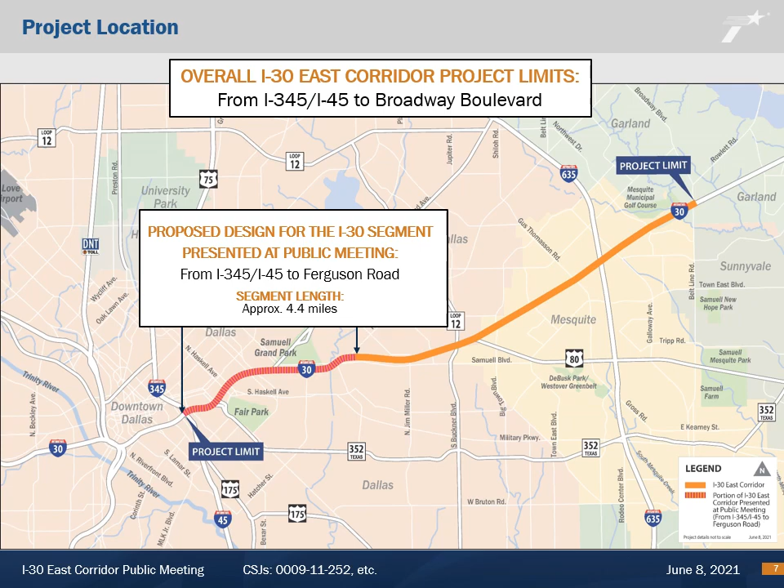This slide provides a brief overview of the project's history and the interagency coordination that have occurred as the project has advanced in its development. Our current work builds off these 3 major studies, along with other studies within the corridor.

First, the 2003 East Corridor Major Investment Study, or MIS, studied I-30 from west of I-45 to Dalrock Road and included multimodal recommendations such as bicycle and pedestrian facilities like the Santa Fe Trail, transit improvements such as the DART Green Line, and I-30 capacity improvements with reversible managed lanes.

An MIS was a precursor to what we now call a feasibility study. Second, the 2005 Project Pegasus included I-30 from Beckley Avenue to east of I-45 and I-35 east from Colorado Boulevard to State Highway 183 and culminated in approved schematic and environmental assessment. This study led to the construction of the

I-30/I-35 East Horseshoe Project. Finally, the 2016 CityMAP considered scenarios for freeways around downtown Dallas, including I-30, I-35 East, and I-345/I-45. CityMAP had 2 I-30 East Corridor scenarios. The first was to construct I-30 East Dallas below grade, and the second proposed relocating I-30 to the south.

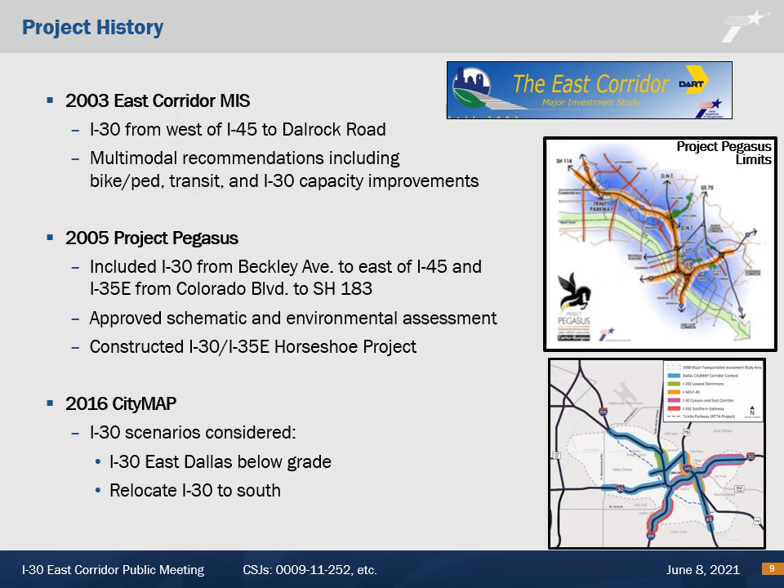In developing the various planning scenarios presented in the TxDOT CityMAP Study, TxDOT applied a variety of guiding principles as it sought to engage with the City of Dallas and other stakeholders interested in the transportation in and around the Central Business District. These guiding principles are listed on this slide, which continue to steer the collaborative process that has thus far led to the proposed design for I-30 presented in this public meeting.

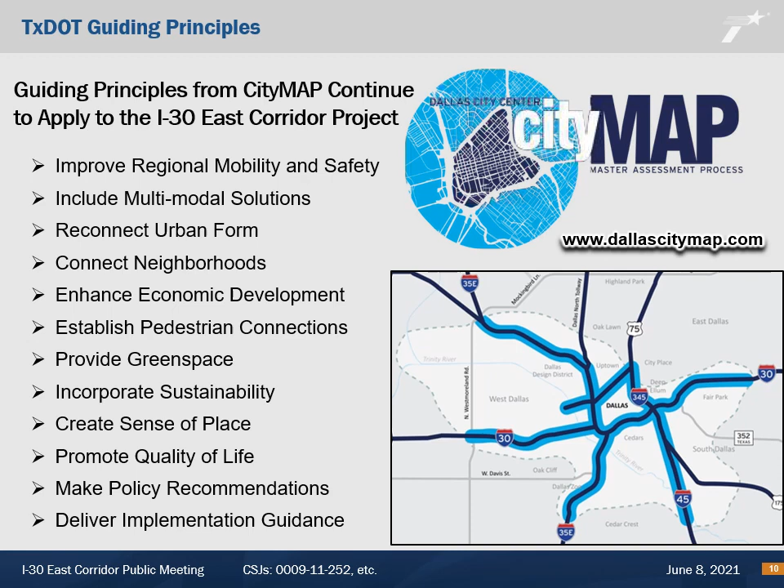The existing I-30 roadway includes 8 general-purpose lanes, 4 in each direction, and 1 reversible high-occupancy vehicle, or HOV, lane. The existing I-30 main lanes and HOV lane are on an elevated bridge structure from I-345/I-45 to Haskell Avenue, with main lane overpasses from Haskell Avenue to Dolphin Road. The frontage roads vary from 2 to 3 lanes in each direction and are discontinuous within these limits.

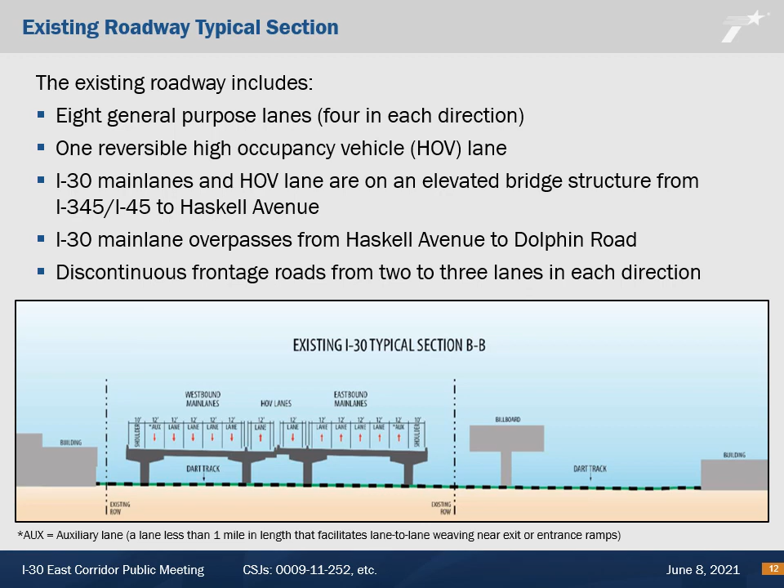The proposed design for the project segment being shared in this public meeting would consist of reconstructing and widening approximately 4.4 miles of I-30, from I-345/I-45 to Ferguson Road. The project would include 10 main lanes, 5 in each direction, thereby increasing freeway capacity. However, a highlight of this reconstruction would be to depress the main lanes below ground level from I-345/I-45 to Dolphin Road, to allow cross streets to bridge over I-30 and connect with frontage roads at grade. This design would serve to reknit the street grid and provide for potential deck parks and plazas that would make the highway less of a barrier between adjacent communities and neighborhoods.

The proposed design also includes 2 reversible managed lanes, discontinuous at-grade frontage roads with 2 to 3 lanes in each direction, and the reconstruction of ramps and bridge structures. Accommodations for bicycle and pedestrian travel along the project corridor are a component of project development.

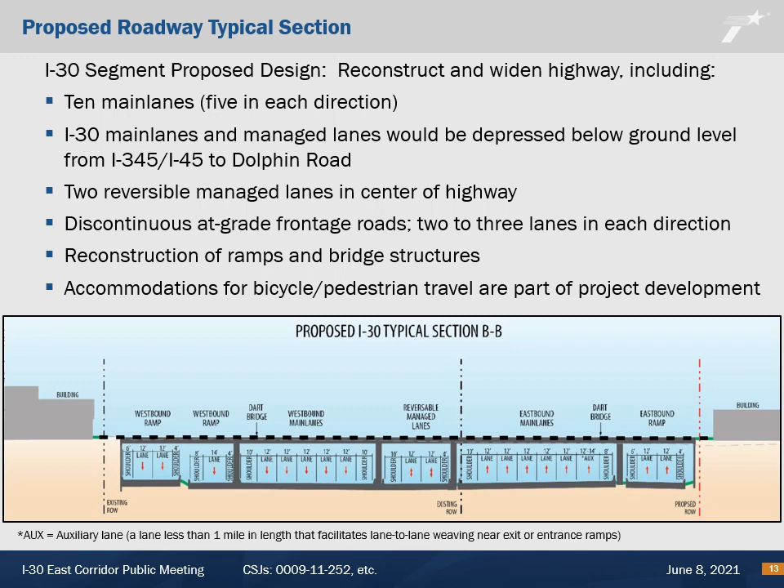This slide further highlights the benefits to the local street network from depressing I-30 main lanes. The proposed project would reconnect Caldwell Street and Beeman Avenue and construct a bridge crossing for city-planned 4th Avenue. A total of 15 streets that currently cross under I-30 bridges from Malcolm X Boulevard to Ferguson Road would cross over I-30 and would have connections with new segments of frontage roads where such are constructed.

In a few instances near the I-30 interchanges with I-345/I-45, small streets that cross beneath the extended I-30 bridge structure would be severed due to the need for ramps connecting with the interchange. However, in all but one instance, these roads would acquire access to the frontage road, or in the case of 3rd Avenue, would have the new roadway bridge for the planned 4th Avenue constructed nearby.

In addition to improving the road network connections, the many cross streets would be compatible with design guidelines in the City of Dallas Complete Streets Design Manual. This manual encourages the design of city streets to do more than simply move traffic. Rather, local streets should also be designed to serve the destinations located along the streets, for safe use by motor vehicles as well as bicyclists and pedestrians.

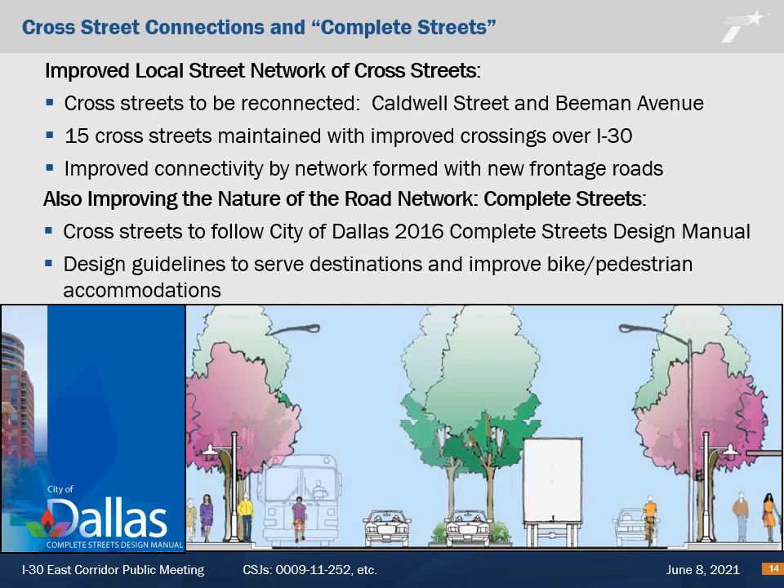This slide displays the current conceptual design for the I-30 East Corridor and an alternative option for ramping and access between I-345 and I-45 and Carroll Avenue. Notable destinations in this part of the corridor are Baylor Hospital and Deep Ellum to the north, and Fair Park to the south.

The topmost roll plot was developed in coordination with the City of Dallas, and it shows highway off and on ramps connecting to a proposed 4th Avenue extension that would lead to Highway 352, 1st Avenue, and the Haskell Peak Couplet. These streets would become the primary north-south thoroughfares through this section of Dallas. 1st Avenue would become the primary connection from I-30 to Baylor Hospital.

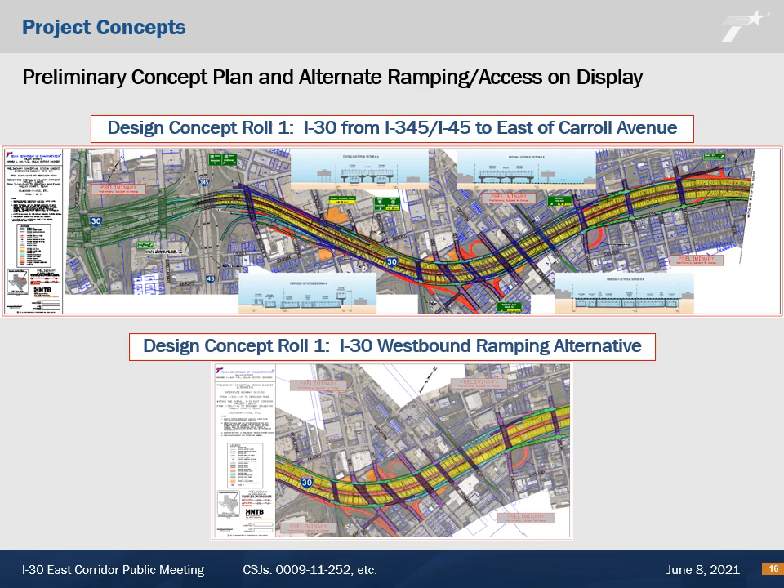This area would not be affected by a choice of either alternative shown in the previous slide. The conceptual design for this section of I-30 shows highway on and off ramps connecting to Munger Boulevard / Ferry Avenue, East Grand Avenue, and Dolphin Road.

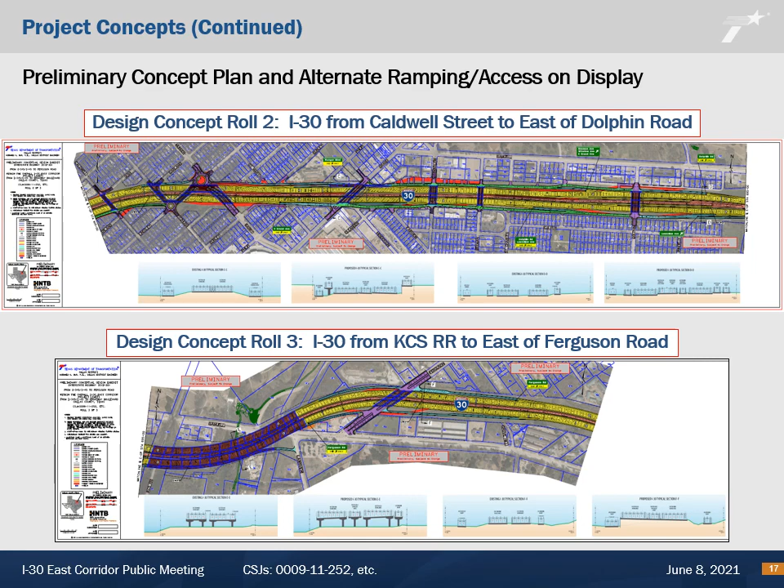These exhibits are available online. After receiving and addressing comments from this public meeting, this current conceptual design will be further refined in coordination with the City of Dallas and developed into a detailed schematic design.

Prior to December 16, 2014, the Federal Highway Administration, or FHWA, reviewed and approved documents prepared under NEPA. However, on December 16, 2014, the Texas Department of Transportation assumed responsibility from FHWA through a Memorandum of Understanding to review and approve certain assigned NEPA environmental documents.

This Memorandum of Understanding between TxDOT and FHWA was updated on December 9, 2019, and the review and approval process prescribed by it applies to this project.

The project constraints map is used to help planners and engineers determine the least impactful method to fulfill the purpose of the project. The design team carefully considers social and environmental constraints during project development. The constraints map was developed early in project design from desktop data. The full map can be viewed on the project website.

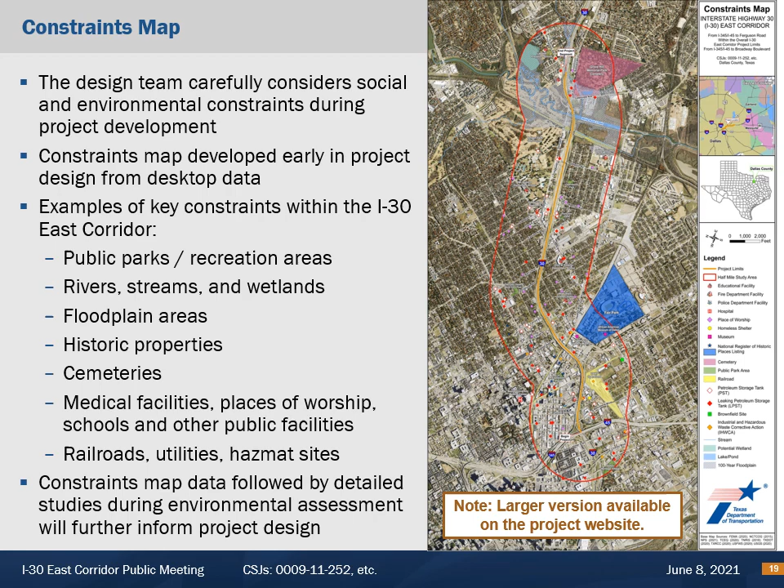The existing right-of-way typically ranges from 195 to 483 feet in width. It is anticipated that additional right-of-way will be required. The final determination of right-of-way or relocation requirements will not be known until the schematic is further detailed and refined. This also applies to existing right-of-way areas determined during project design to be surplus to future transportation needs.

The process begins once construction is complete and is handled by TxDOT's right-of-way division. Surplus tracts would first be offered for purchase at the appraised value to the City of Dallas, Dallas County, and Dallas Independent School District for 30 days.

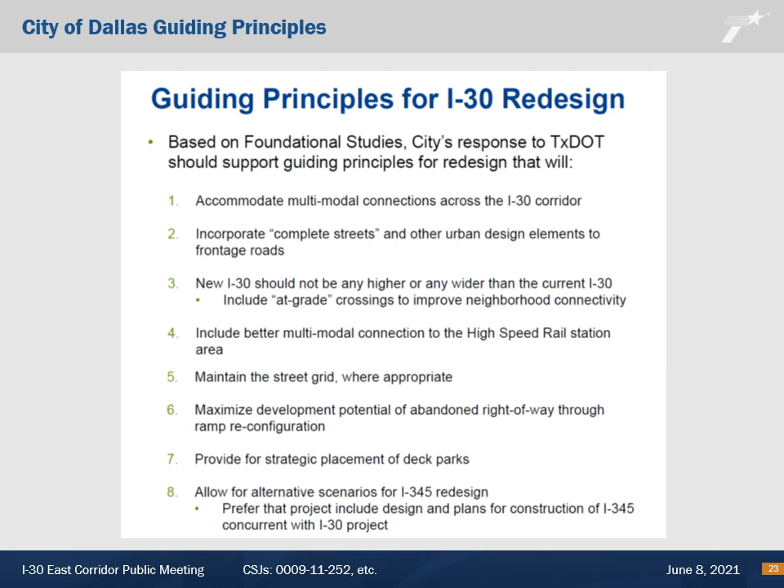The work group supports the process TxDOT is following and is committed to working together for the duration of the I-30 East Corridor project. Once public meeting comments have been received, the work group will reconvene to address public comments and complete the schematic and environmental evaluation process.

The City of Dallas has been coordinating with TxDOT on the proposed improvements for the I-30 East Corridor project, evaluating many of the concepts developed jointly by TxDOT and city staff. Major topics of discussion have included providing for complete street sections on cross streets and frontage roads, coordinating the modified access and influence on the city street grid, providing allowances for deck parks, and identifying potential surplus right-of-way.